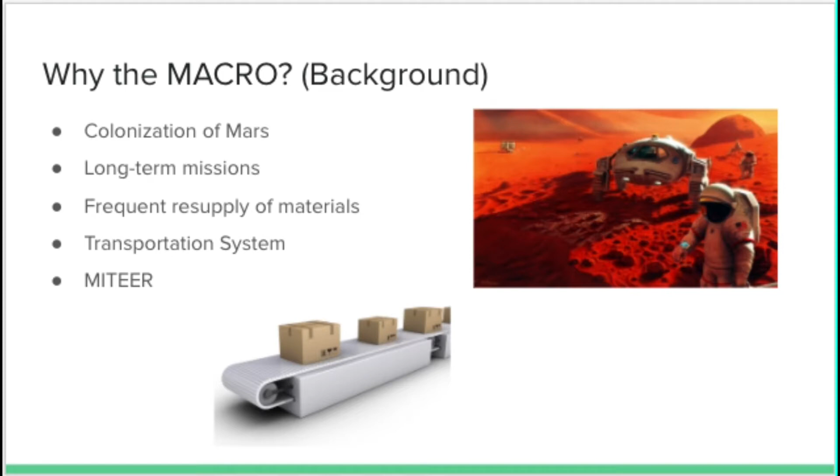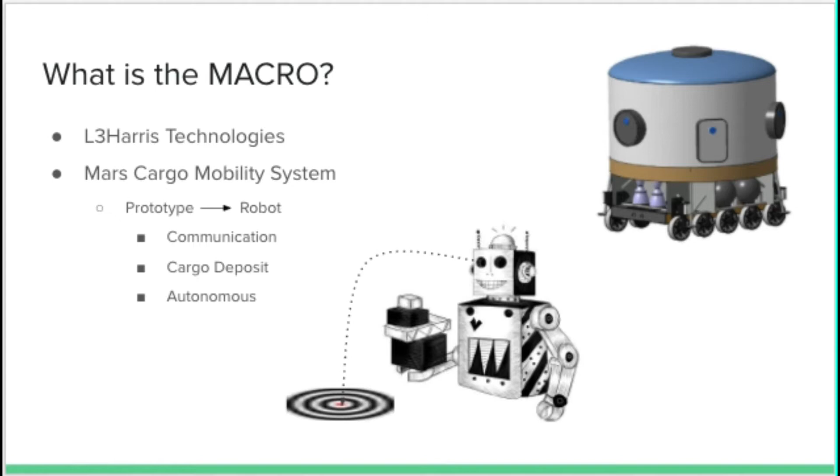We were specifically tasked by L3Harris Technologies, an American tech company, to create a small prototype for this future Mars rover, which we call the Mars Cargo Mobility System. We were told that whatever prototype we construct must fulfill general requirements. These included being able to receive and interpret information to follow specific instructions, deposit some sort of cargo, and function completely autonomously. We will get into more detailed specifications later in our presentation.

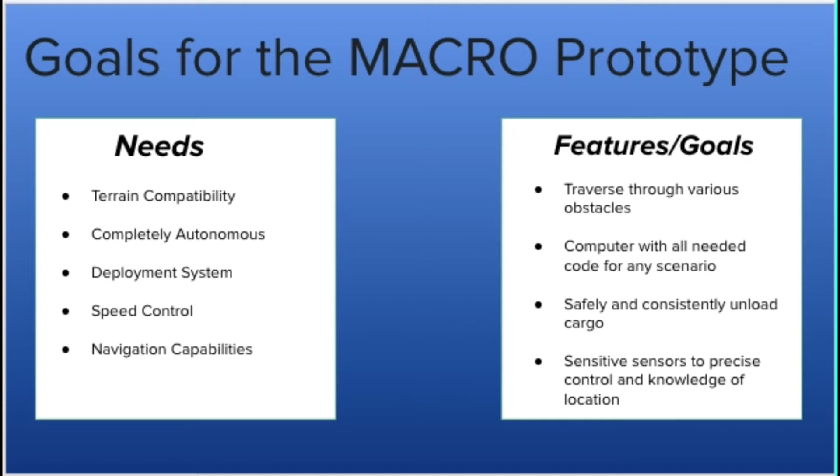We outlined these general needs and created corresponding objectives. Across all of our goals, we wanted to ensure our prototype could accommodate for any challenge it faced. Additionally, some underlying goals include implementing the most practical solutions that would be least time-consuming, yet most favorable to the prototype's optimization.

To keep the design of this project organized, the team decided to designate roles for particular aspects of the project. Nihar and Jason were responsible for the documentation and implementation of Python code when programming the prototype. The functions for the prototype that the software manager had to be able to accomplish included moving in straight lines, turning, varying the speeds, executing actions involved with deployment, and detecting various obstacles. Jason and Nihar were also responsible for the construction of major components of the prototype, which were the base and wheels. They were also responsible for the placement of the Raspberry Pi, sensors, and cargo.

I was responsible for the documentation of the process of manufacturing, any setbacks, any breakthroughs, and any experimentation and results. Andrew was responsible for suggesting ideas to the team. Suggestions included features that solved issues for the robot, questioning ideas to ensure that the most efficient design was being implemented, and reinforcing the key purposes and functions that the prototype had to perform.

Before getting started on laying out the tasks for the next 8 weeks, our team had to figure out and address the subsystems required for a functioning macro prototype. The prototype needed to have 2 moving parts, one for driving and one for depositing the cargo. Additionally, it needed 3 detection systems for finding lines, magnetic fields, and large-scale objects to avoid. All of these mechanisms will connect back to the CPU, which feeds them power and information. All of these subcomponents will also be protected by structural housing.

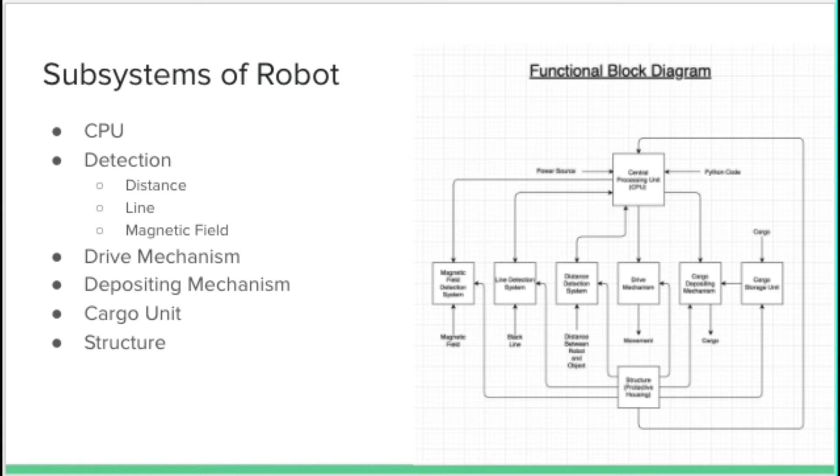In order to build a prototype that met the desired needs, there were 5 key actions that had to be done. Number 1 was to set up the Raspberry Pi. This included installing the software, connecting the Grove Pi and Brick Pi, and plugging the cords into the respective ports. The second action was to design the robot. This included creating a blueprint for the structure and Python code that would be needed to operate the robot.

The third action was to build the robot and write the Python code. The fourth action was to test the robot, which included debugging the Python code and testing the robot's functionality through trial runs. The fifth and final action was to document the entire process throughout the completion of this project.

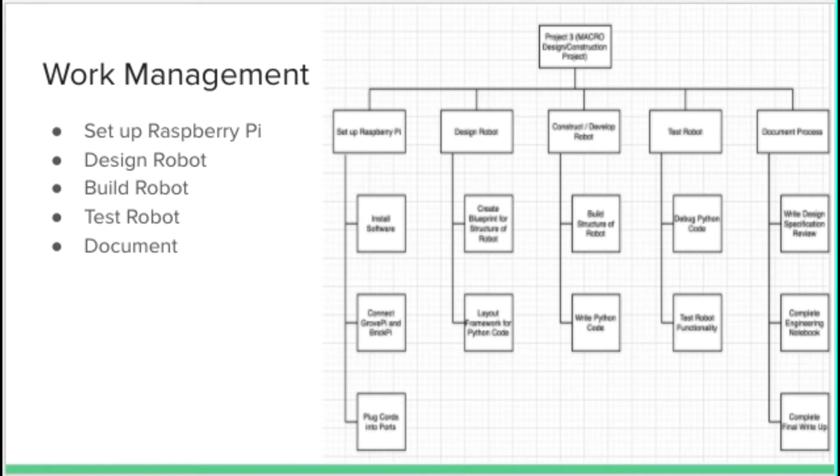To summarize the specific needs and requirements of our prototype, we outlined its 5 main functions. Essentially, the prototype must steadily traverse the given terrain to specific sites as quickly as possible without dropping the cargo or colliding with any hazards. The prototype must also deposit the cargo accurately and consistently.

Included in this table, we have our quantitative goals for each of the needs, which we deemed both practical and most optimal for the prototype's performance after studying the project's guidelines and researching various cargo transportation systems. Examples of our target values for the prototype are depositing cargo within 4 inches of the desired drop-off location and it being able to withstand at least a 45-degree incline without dropping that cargo.

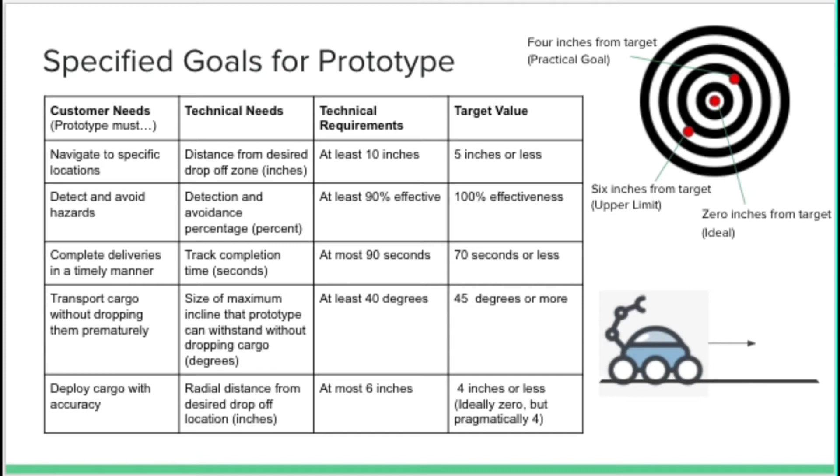This is the decision matrix our team created when it came to choosing what features we should include in the prototype. The first category is how fast we can make the robot go. This had a weight of 5 points. Having the motors on the front wheels did outperform having the motors on the back wheels by a slight margin of 10 points.

The second category is the accuracy of our navigation system. This had the highest weight of 20 points. Two line sensors proved to be much better than one line sensor, as two line sensors outscored the one line sensor by 100 points. The third category is the accuracy of the cargo deployment.

This had the second highest weight of 15 points. Here the arm clamps outperformed the ramp and conveyor belt system by 30 points. The fourth category is tied for the highest point worth of 20 points, the consistency at which the prototype could deploy the cargo. Here the ramp and conveyor belt system outperformed the arm clamp by a slight 20 points.

The fifth category was the stability of the prototype. This had a weight of 10 points. The large base here scored nearly double the points of the smaller base. The sixth and final category is the weight of the prototype overall. This tied for the lowest weight of 5 points. A smaller base here proved much better than a large one by 15 points.

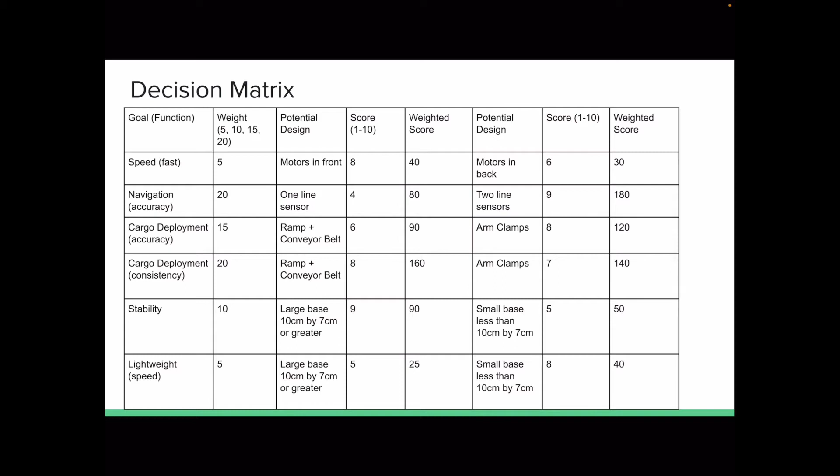Getting to our actual prototype, our team mostly chose what had the best score in the decision matrix, but also added new elements that we left out, as well as combined multiple ideas.

The hardware mechanics of the base include the following: a rectangular reinforced frame. This reduced the bending of the prototype due to the overall weight of the components. This frame was 26.3 centimeters by 20.0 centimeters.

The use of 4 wheels and 3 wheels. 4 wheels were often better at climbing and getting over obstacles, but 3 wheels, 2 powered wheels in the front, 1 pivot wheel in the back, was much better for making tight corners.

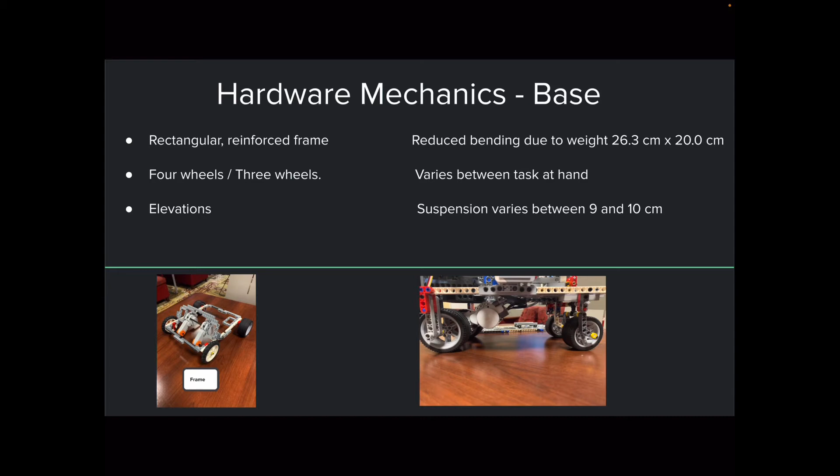The elevation of the prototype. The prototype had an elevation of 10 centimeters in the front and 9 centimeters in the back, both relative from ground to frame. This was because of our use of larger wheels in the front.

The hardware mechanics of the deployment system include 3 parts. The first being the physical conveyor belt system, 2 belts side by side that were positioned on wheel rims. Both belts were driven by the same motor for consistent speeds.

The second part is the walls. We had 2 side walls to support the cargo, as well as a back wall to make sure it did not fall into the Pi computer. The ramp acted as a 4th wall when it was positioned upwards.

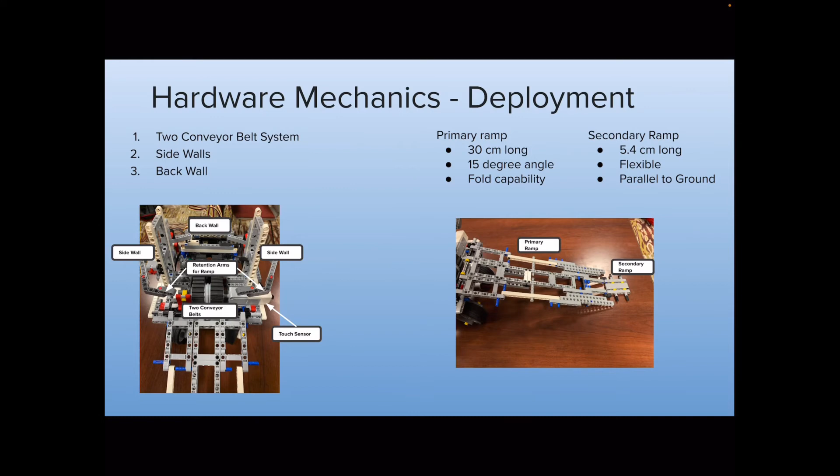The last part is the ramp. This consisted of a primary ramp that was 30 centimeters long and a secondary ramp that was 5.4 centimeters long. The primary ramp achieved an initial goal we set of 15 degrees relative to the ground. This allowed for the cargo to retain the correct orientation when being unloaded. The secondary ramp was parallel to the ground to help achieve a higher consistency of successful unloading. Both ramps were flexible.

Getting to the hardware mechanics of the sensors and motors, the first thing we decided as a team to implement was the use of 2 line finders that were 5 centimeters apart. This gave us a nearly perfect line detection and only struggled on really sharp corners.

The Hall sensor was positioned directly in the center of the robot and quite close to the ground. It had the ability to pivot, so if it struck an object, such as a hill, it could bend upwards and out of the way.

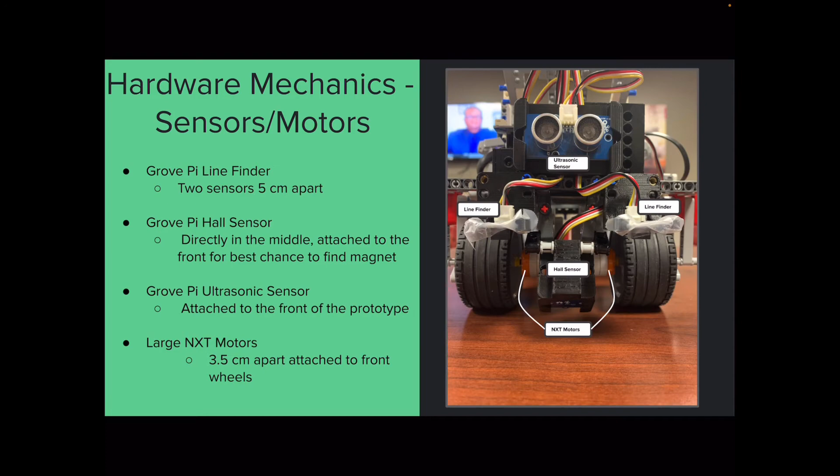We attached the ultrasonic sensor directly on the front above the Hall sensor. This was a good place for it to sense if any objects were in the way of travel of the prototype. 1 large NXT motor was placed on each of the front wheels, allowing each wheel to spin at a different speed. This was most useful when it came to being able to turn the robot.

When designing the software that would allow the prototype to successfully navigate the terrain and appropriately deploy cargo, we first had to figure out the main functions and processes that would allow for the completion of these tasks. Based off of information about the track, we decided on 2 main processes to be coded for the prototype.

The first of these processes is line finding. This process would implement the Grove Pi line finders and the main motor responsible for driving the prototype in order to allow the prototype to successfully navigate the course. The successful detection of the black lines of the course would keep the prototype from veering off the track.

The second of these processes is Hall sensing and cargo deployment. These 2 functions are combined into one process because they are sequential functions, where the successful deployment of cargo relies on successful Hall sensing. This process would implement the Grove Pi Hall sensor, which detects the magnets at specified locations on the track, and the motor for the cargo deployment system, which runs a conveyor belt.

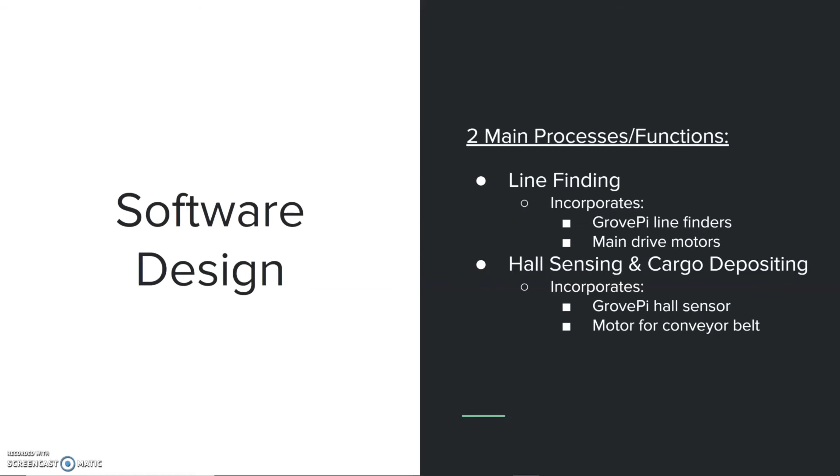Now, looking at the specific code we use to achieve proper line finding on the course, the first step was to initiate the main drive motors to a set speed. After that, the code would reach the 4 main conditionals we had and continuously update these 4 conditionals in intervals of 0.02 seconds until the program is manually stopped by the user.

We had to decide on this interval based on a couple of factors, such as our main speed and the distance between the 2 line sensors. After numerous tests, we concluded that an interval of 0.02 seconds would be quick enough so that the robot would not miss a line. The 4 conditionals we used were pretty straightforward. The first one checked to see if both line finders detected white, and if they did, the robot should continue straight.

The second conditional checked if both line finders detected black, and if they did, the robot should continue straight but slightly slower to adjust itself. The third checked if only the right line finder detected black, and if so, the robot should turn right. The fourth checked if only the left line finder detected black, and if so, the robot should turn left. By running through these conditionals continuously, the robot could continuously adjust itself along the black line and not veer off the track.

We decided this was the most efficient method to assist the robot in navigating the course, because in the actual code it only required 4 simple while loops, one for each conditional, and the code was simple and ran smoothly.

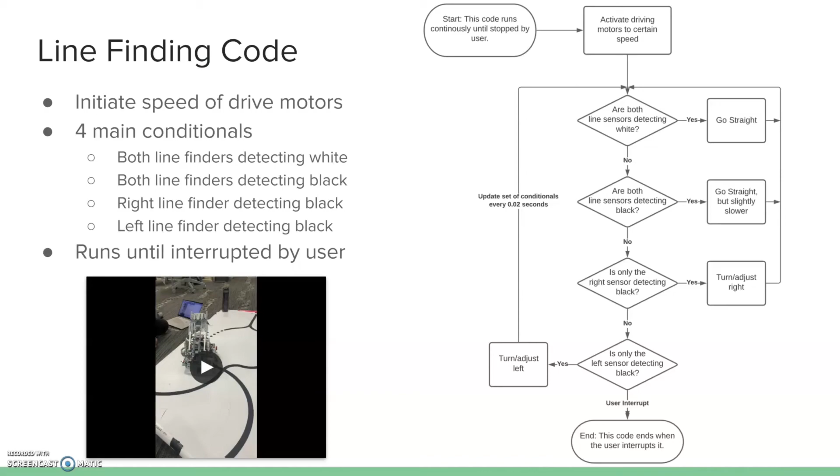Our final code for the robot merged these two processes together, where the line finding was the main code and the Hall sensing code ran in the background. The line finding code ran continuously throughout the whole course until there was user interruption, and the Hall sensing code activated when necessary to deploy the cargo.

After completing our prototype and the software behind it, we of course had to test it out on the course that was given to us. Here's a map of that course.

First up was the obstacle. This was a roughly 1-inch tall dowel rod that our robot had to climb over. It ended up taking us almost 2 minutes to get over it, which was much longer than we anticipated. After making some speed adjustments though, we were able to get over the rod.

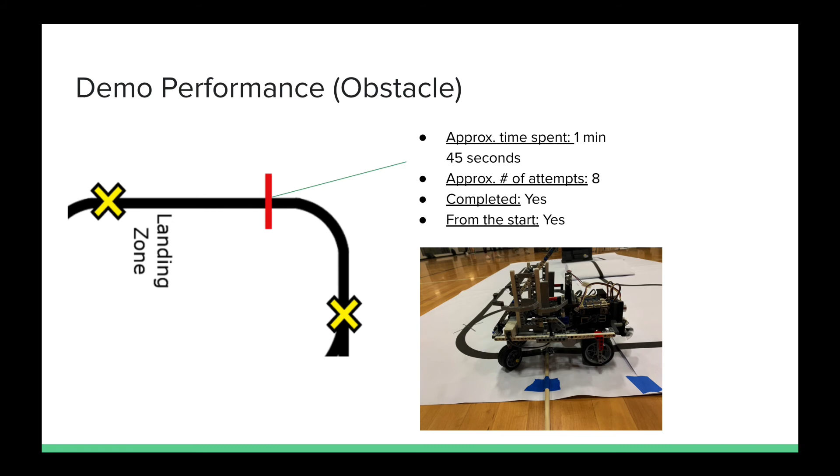Next was attempting to successfully unload the cargo. We were only able to successfully deposit the cone, and when we did, our prototype missed the first unloading zone and deployed it only at the second one. The cone also toppled over and slid, which left our measured distance at 34 inches, missing our target value by 850%.

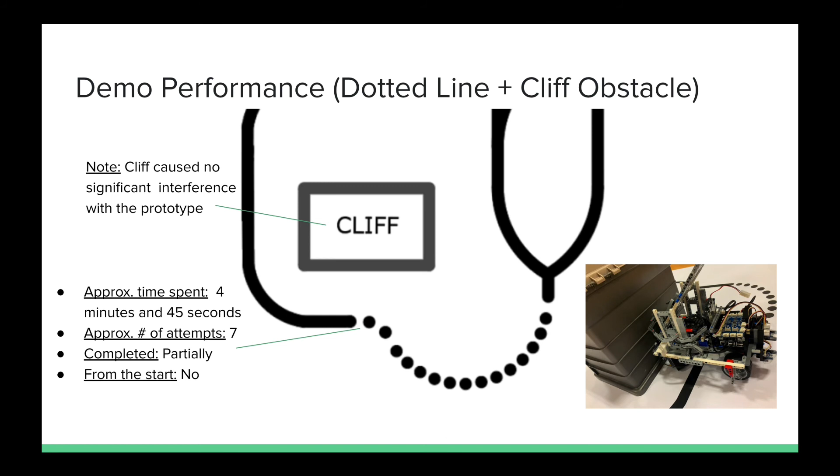The next task we were prompted to complete was navigating a sharp dotted line while avoiding a cliff, which was simulated by a project kit box. After some turn speed adjustments, we nearly completed it. The transition from dotted line to solid line was too sharp for our robot, and we couldn't completely pass this test.

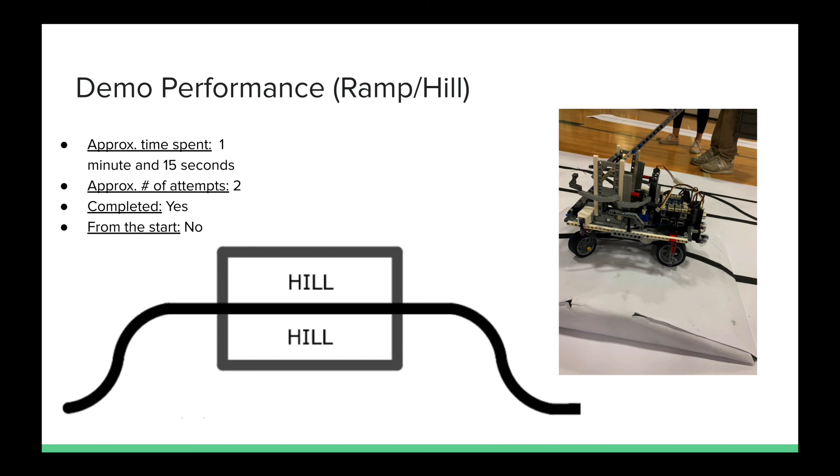Lastly, our robot was expected to successfully climb a roughly 20-degree hill. This was definitely the highlight of our performance, as our robot only took 2 attempts to successfully mount and complete the hill. Our prototype overall performed well.

The demonstration highlighted some positive and negative factors of the robot. The robot has a solid structure which allowed it to go through the demonstration without wobbling or tipping over at any point. The robot also maintained the cargo very well during transport because of the numerous features protecting it, such as the ramp, walls around it, and the retention arms. One of the biggest positives of the robot was its mobility. The singular wheel in the back allowed the robot to move with ease and precision.

Now for some drawbacks of our design. Although the robot could turn well, it had trouble navigating smaller turns equal to or less than 90 degrees. Additionally, due to the ramp's size of 35.4 centimeters, the robot was not extremely accurate when deploying the cargo. This is because the Hall sensor was at the front of the robot, while the ramp would be deploying the cargo at the back, which made timing deployment difficult.

One final negative was the functionality of the Hall sensor. The robot was programmed to deploy the cargo after it detected a second magnet. However, the robot would sometimes detect the same magnet twice, and this contributed to a decrease in accuracy of the cargo deployment.

So a summary of our project: the robot that we constructed overall met the requirements described earlier. The prototype was able to follow a specific path, detect and avoid obstacles, and carry and unload cargo in a somewhat timely manner. But there are a few things we could improve upon to increase the robot's efficiency.

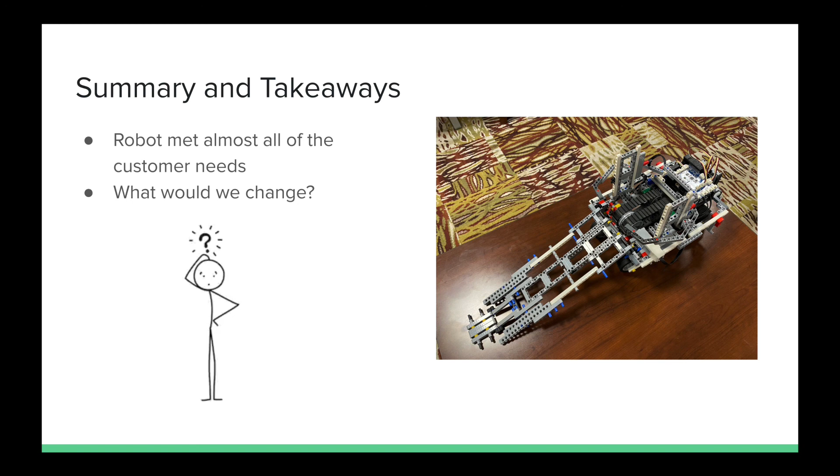With these changes, we believe the prototype would prove to be fully optimal in a follow-up project.